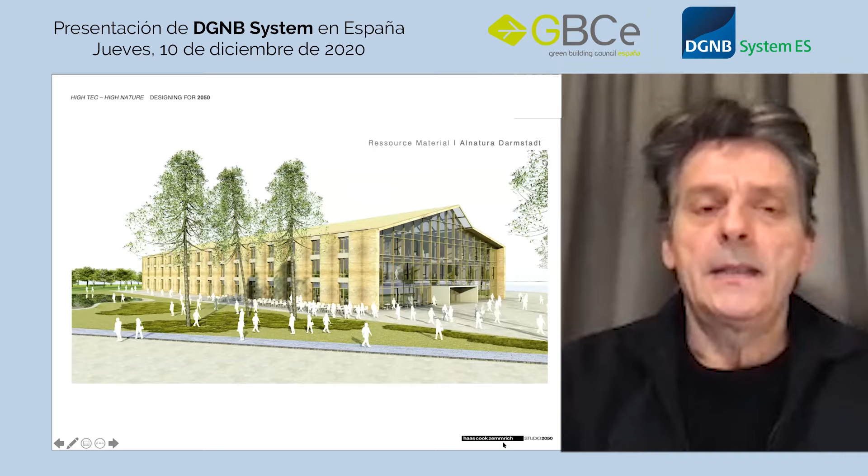And when we started and when we located the site, we searched potential sites together with the client. We came in with a clear agenda of using as much as possible what we find on site. The regional approach to reduce the impact of driving, of transport for the goods is, in my understanding, also a very good criteria to reduce the resources. So the site itself, it's a former military camp, and we were close to the city center, so we had a very good mobility connection, a public transport connection to the city.

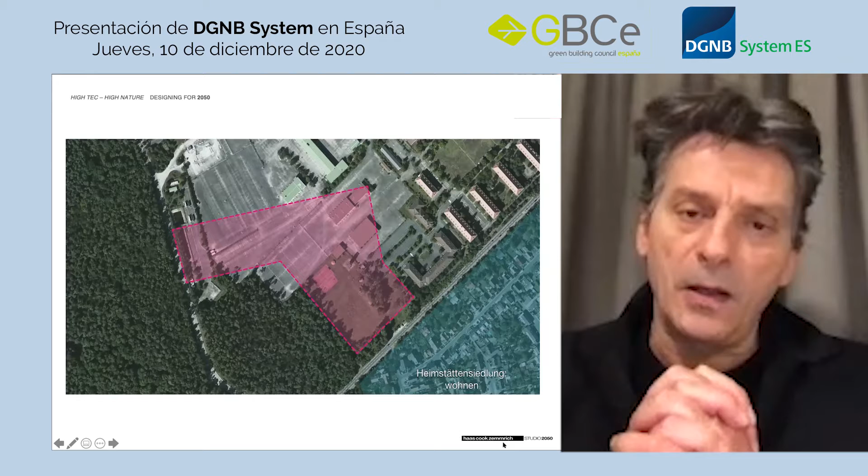Close by there was this forest, and the forest is a perfect source of fresh air. In the forest you have 5 degrees less in the summer, so we can use the evaporation cooling system of the trees for ventilation. And we also reused the pavement structures of these former military parking lots, recycled everything and reused it in the building.

So we started with labeling our aims and our criteria in the architectural meaning. And when it comes to architecture, we talk about the space, so reduce the footprint of the building, open up as much as possible, allowing the microclimate to interact with the building, not sealing too much in order to get rid of heat island effects. We thought that we have to check very carefully the life cycle of the materials we will use. We want to have an optimized building envelope, and a reduced consumption of materials, build only what is really needed.

So we talked very eagerly with the client to shrink the amount of separation walls and everything which you usually stuff in a building to a minimum. And as I said, employment of natural and renewable building materials. When we start that, we usually start with a careful analysis of the potential of the site. So we look at the solar hours, the impact of geothermal possibilities, possible synergies between different functions.

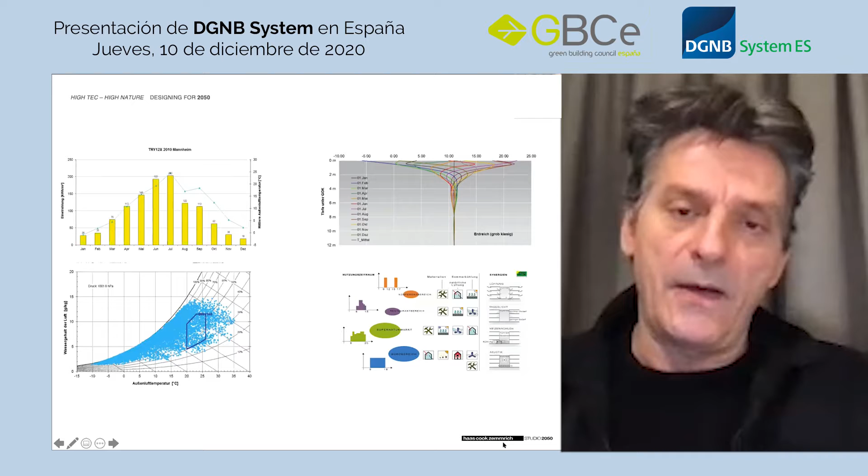So we checked carefully what the Supernaturmarkt could gain in terms of heat loads they use for the refrigerators we can reuse in the office. And then we located the building clearly north-south in order to have a clear north-orientated facade, which is the optimized daylight source without any solar gains. As I said, we used the close-by forest as a fresh air source.

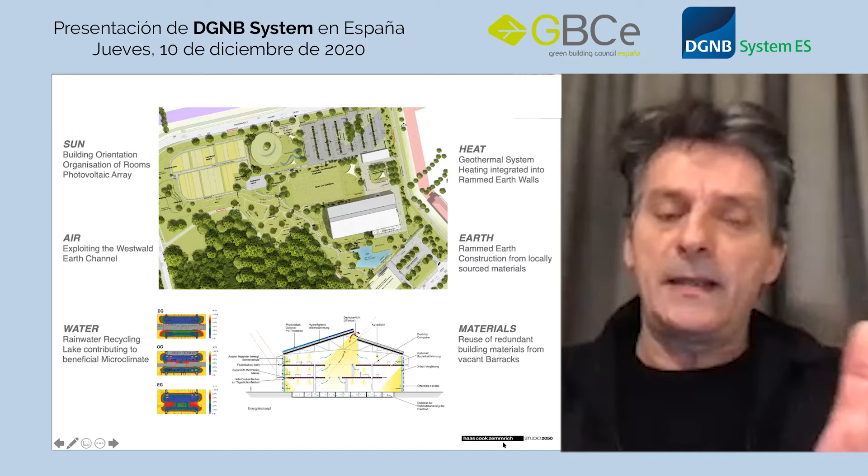We had an earth duct where we suck in the fresh air, and we used the chimney effect of this atrium in order to have a natural ventilation flow in the building. We raised the ceiling heights in order to allow maximum daylight in the center of the building to have a daylight optimized building structure. And this gives you a bit of an understanding. We used geothermal for potential heating devices, etc. So it was a very highly sophisticated general approach of sustainability. And we, as architects, I believe we have a lot of knowledge in this field.

We have also partners. We worked with Transsolar. We had structural engineers who were also aware about the situation, about reduction of material resources and stuff like that. But also the DGNB criteria was a very crucial part in that, because it was this objective criteria.

When you talk with a client about potential impacts of materials, and you always, as an architect, have a direct contact with a client, it gives you a much better position if a source like the DGNB criteria list is an objective measurement, a transparent measurement that what you do is giving a better result. And this objective criteria list is also a very important kind of list setting, which gives you guidance and a guideline throughout the building process.

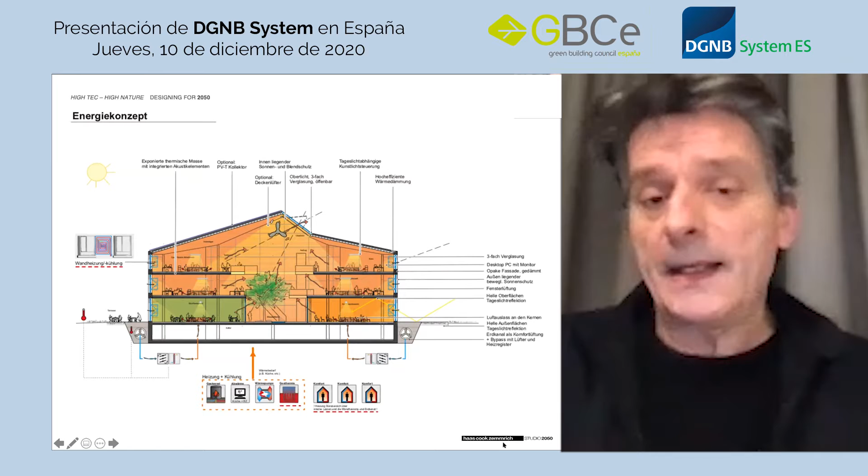I believe we have lots of architects in this webinar. So you know about the difficulties, the discussion about costs, about timing and stuff like that. And then the criteria list of the DGNB gives you very perfect guidance what else needs to be addressed beside the big picture elements of architecture and sustainability. It's also the small elements which make a difference. And therefore, we were very happy that the DGNB were part of this development and helped us to steer the process with the client. It was, as I said, an important supporter in the final result.

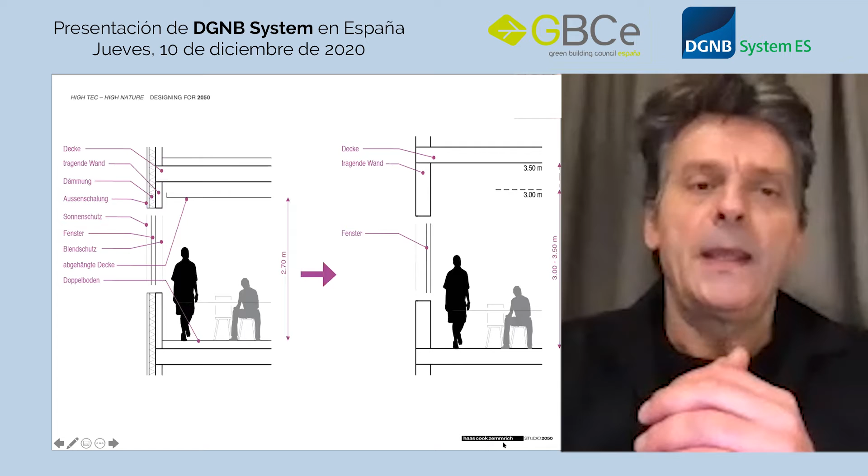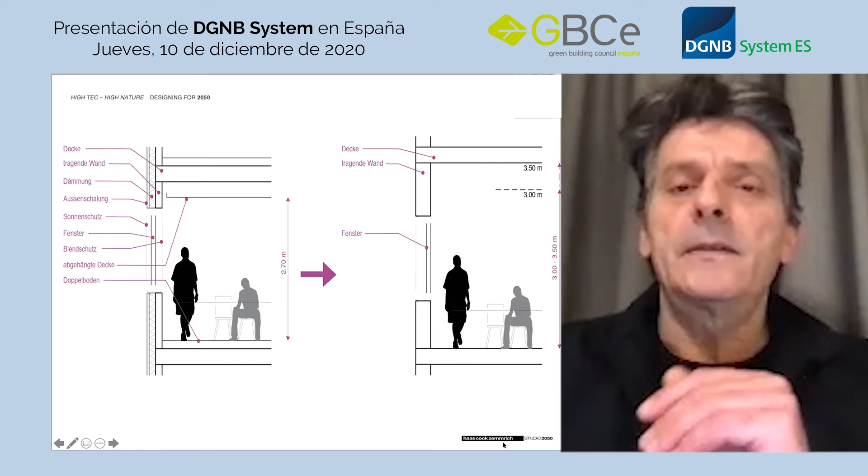What is there is what the people can see. And as I said, when you need lights, we put them underneath the ceiling, we put them on the floor, we don't put them in a raised ceiling. And we also had the target to reduce the layer structure of the wall. Because when you address this crucial passive approach to architecture, you also have a bit of an assurance that in the long-term perspective, the structure is still in use because it's not related to technical solutions.

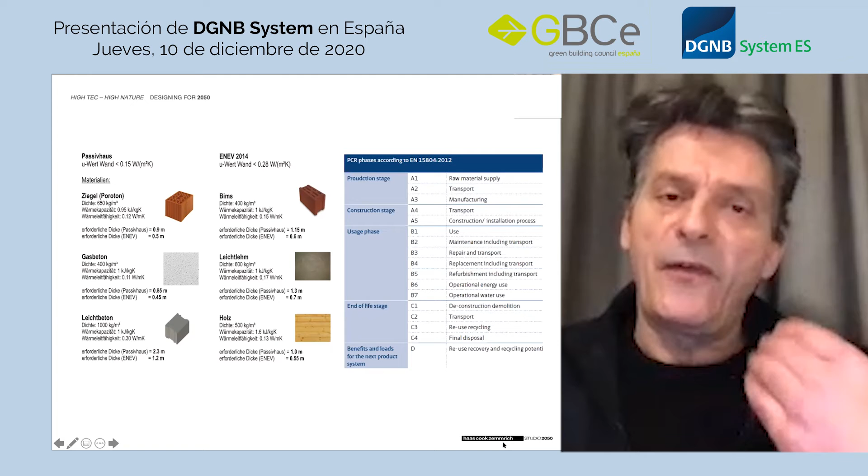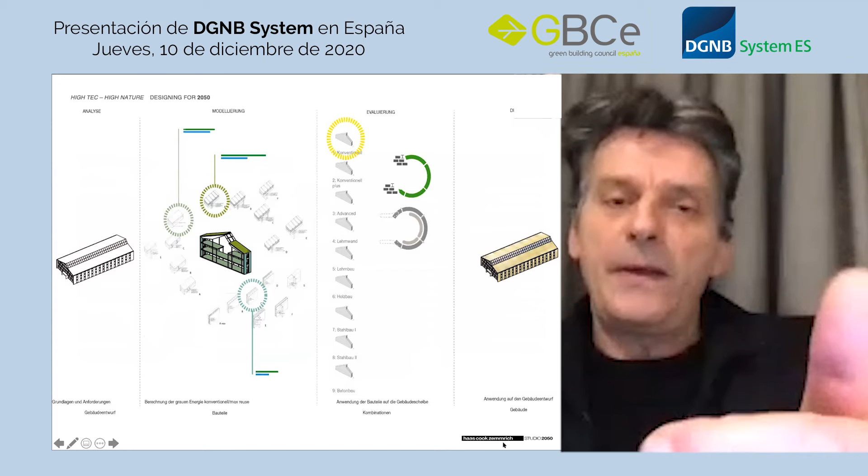What we did then, together with the University in Munich, was a life cycle analysis of various materials, because at the beginning we only had the structure in mind. We knew how the building should be shaped, but we hadn't made the final decision on what kind of materials we want to use. So with this typical PCR phases analysis, we could check the embedded energy, the performance energy of various materials. We did a kind of section throughout the building, checked the impact on the carbon footprint of various material options. And finally, we ended with rammed earth as a very good potential facade cladding material.

I'm not a rammed earth expert. I wasn't at the beginning. Now I know a bit better, and we will reuse the material further on. But when it came up to rammed earth as a potential material, we teamed up with Martin Rauch, who's an expert in that field, and we tested over a long period how this wall could be engineered with an embedded geothermal heating and cooling device, because we realized with this simple structure that it works brilliantly for 80% of the year, but in winter it cools out too easily, and in summer we need to have a bit of cooling.

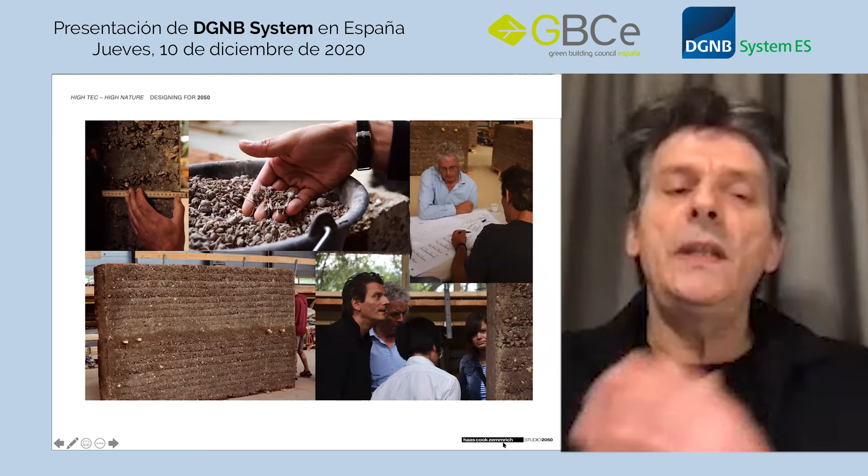So then we said, let's install in that rammed earth a water piping system which is connected to a heat pump, and the heat pump is connected to a geothermal resource to have a radiant heating and cooling device in that rammed earth. It was a development that took us almost half a year, because the material is not listed in Germany. We had to do a lot of testing.

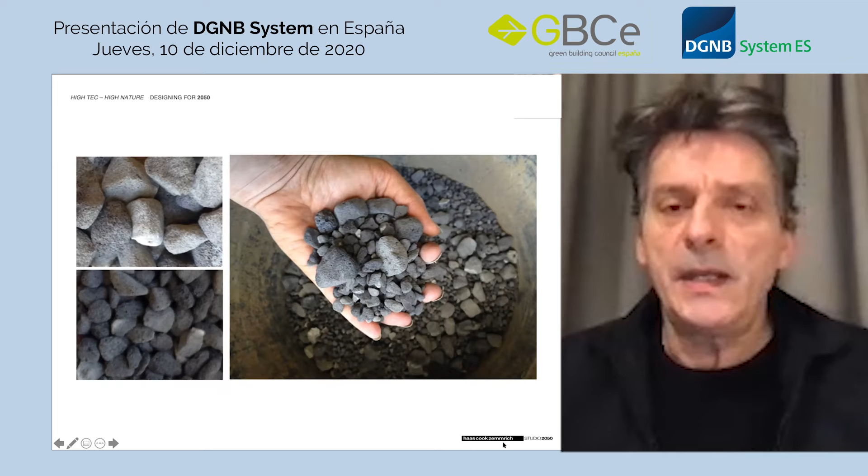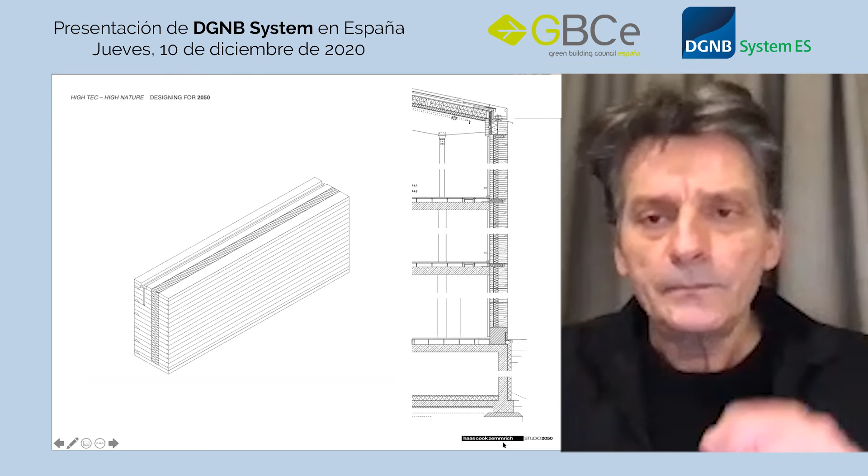We also invented a new facade insulation material, recycled glass gravel, which we rammed in that wall as the insulation layer. So finally it came up with this rammed earth block, 3 meters by 1 meter in height, 70 centimeters thick. And we had this massive wall produced on site, dried out for 3 months, and then finally installed on site to the building.

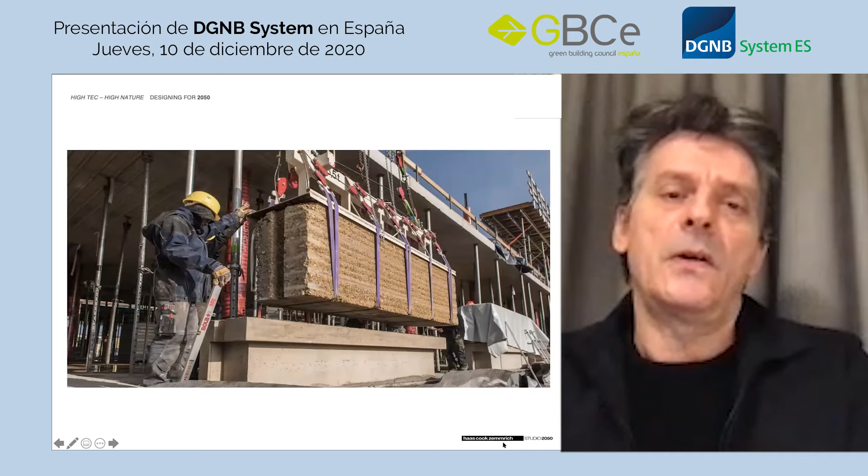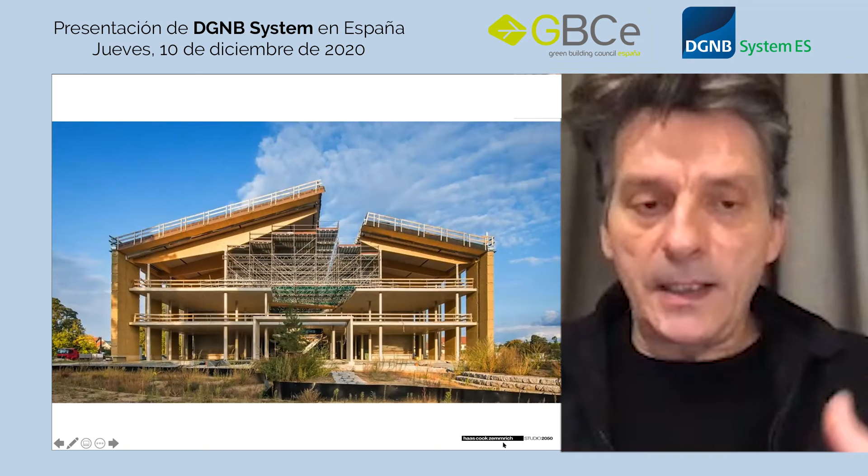The roof is out of wood. You see the ceiling on the inside is still in concrete. We had a lot of debates, shall we produce the ceilings in wood or not? And we finally came up with concrete as a good solution, because we wanted to use the thermal mass of the materials for further balancing the heating and cooling loads in the building.

So I'm going very quickly, since we consumed so much time this morning, over the interior look. The good thing with these natural materials, which we as architects have to acknowledge, is that it gives back an emotional link to the users. The people appreciate the very nice atmosphere, the comfortable air quality, which is what the rammed earth is doing.

And I think that is probably the biggest success you can do as an architect, that people appreciate the places you generated. And even if it is a working space, it is very much appreciated by the client and its users as a perfect situation for working and interaction.

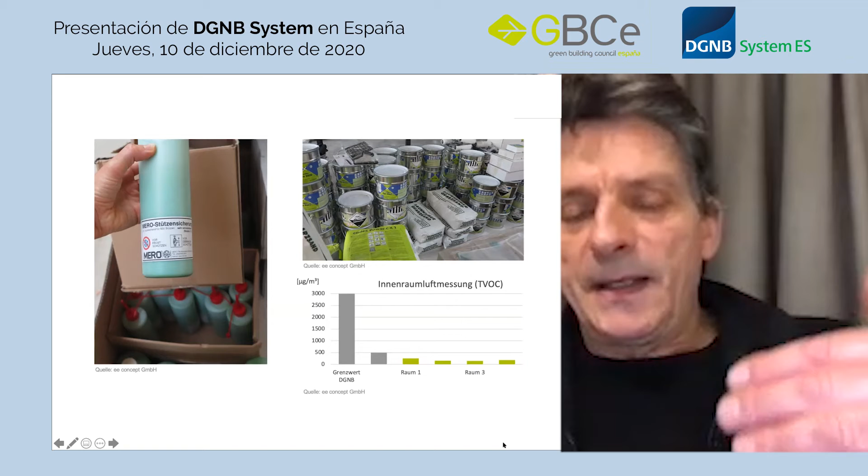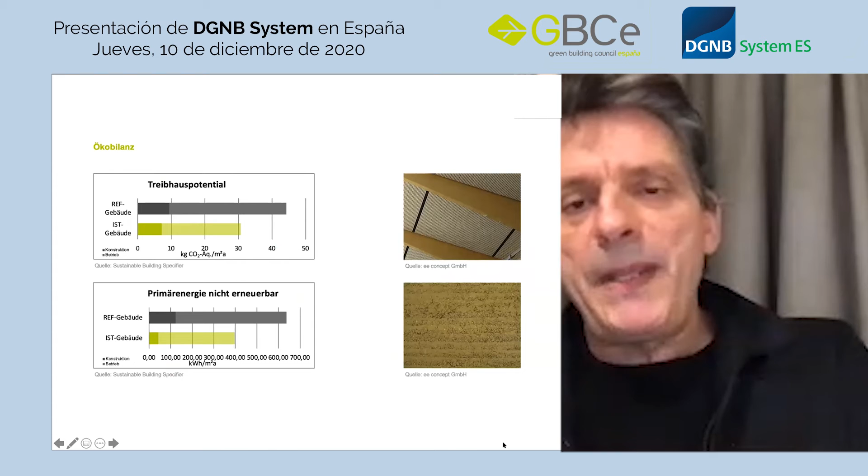And this kind of criteria, this kind of transparent list, shows also the client that all the effort of the planning and the extra effort of rethinking a lot of things made a lot of sense. So that is only a bit of guidance which the DGNB gives you easily.

And at the very end, I believe that we as architects, we as an architectural society, have to acknowledge that the transparent performance of the building needs to be proved after the building is completed. Quite often you have a perfect plan, you know what to do, but a very sustainable building needs to be interacted with. People have to know when they have to close the shading devices, when they have to open windows, when you come to a naturally ventilated building.

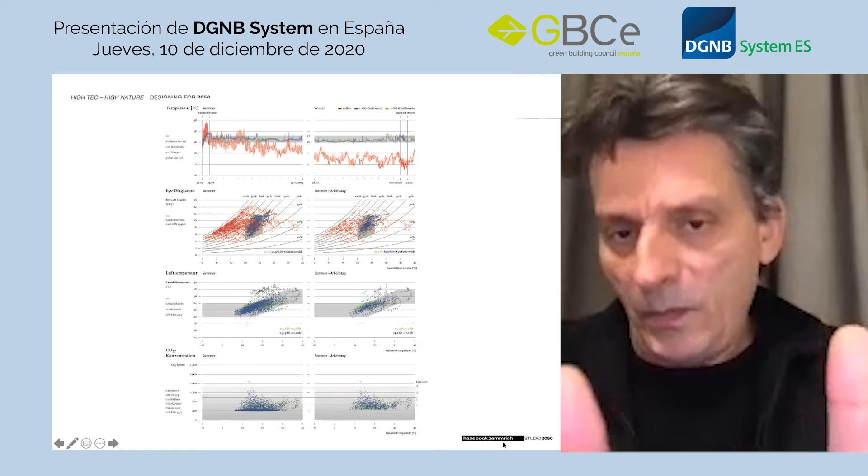but the impacts where the blue line exceeds the gray bar show you also that on this particular day, the people didn't shut the shading system, so they didn't use the building properly. And therefore the monitoring is a very good element to steer and help a client to give the building the performance as it was planned at the very beginning.

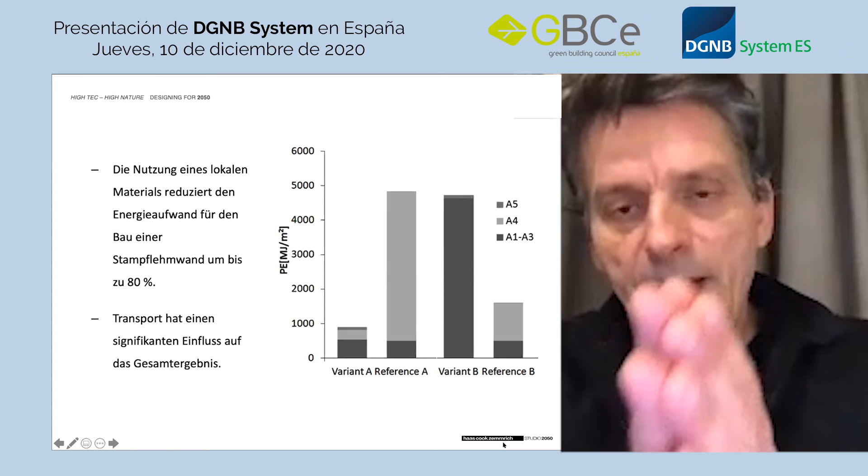So that is also something where the DGNB system, our partners, the planning, showed the potential of this innovative approach in architecture, that local production of materials is very important, that the energy consumption for transportation is a big thing.

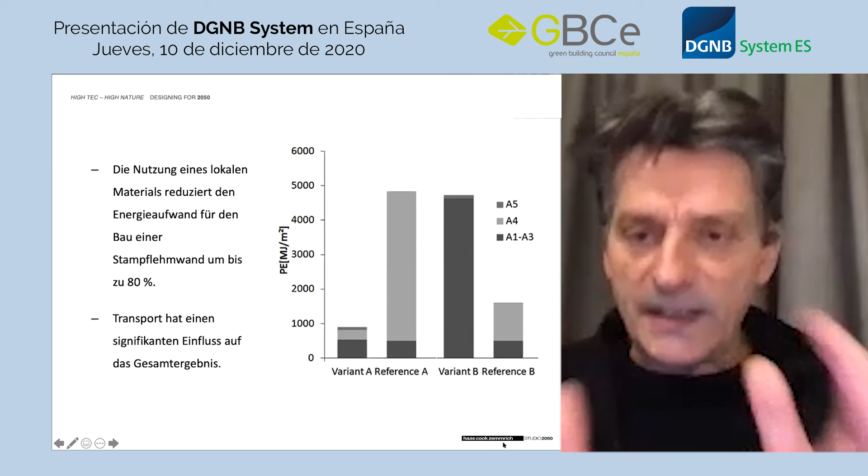And this diagram shows you that even if we used rammed earth, the carbon footprint of this rammed earth facade was still not quite good, because we had 170 kilometers to bring in the rammed earth, since there was sandy soil on the site, and we didn't find the appropriate earth in Darmstadt. So transportation, a very important outcome of the research and of the monitoring system, is a big effort when it comes to carbon neutral buildings.

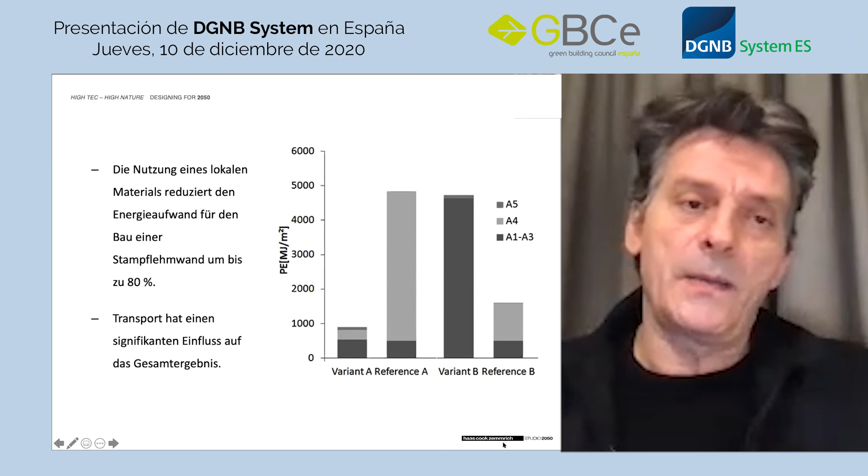Hope you understand that I was going rapidly through the presentation since we had this 20-minute slot. Finally, to summarize, even as architects, we quite often think we have the solutions ahead, but it is very, very important to have a system like the DGNB as a perfect partner for guidance, steering through the process to finally come up with a solution which is really sustainable. Thank you very much.

Thank you very much, Martin. It's always a pleasure listening to this presentation of your building. It's not the first time, and you always discover new parts. I really like the fact that you insist so much that the DGNB system is a partner in the process. It is not something that you have to use at the end just to get the certification. It is not something that is imposing on you, obliging you to do certain things.

It's something that you take by the hand from the beginning, and that you find a really useful tool to improve your architecture. It's not a limitation, it's something that is enriching. I think that's a very important message to give to many architects who are still maybe doubting or having certain kinds of resistance towards sustainability.